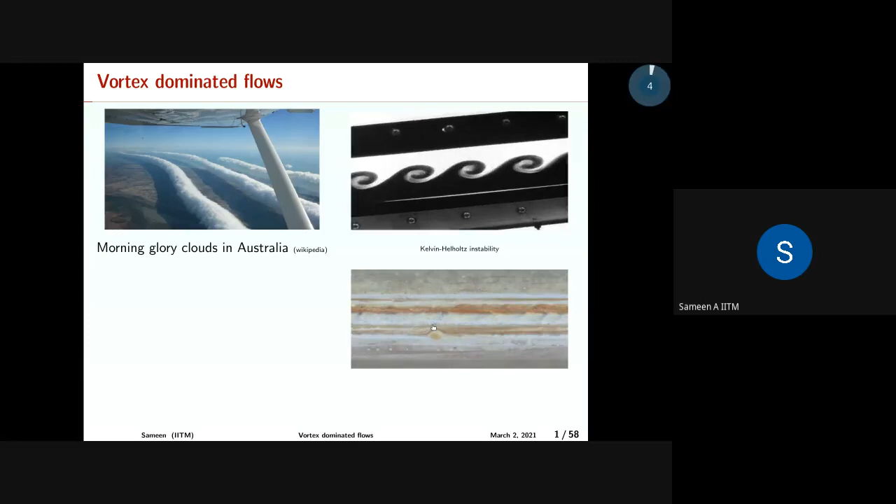So what are the reasons for these? When do these vortices break down? All kinds of scenarios are something that you see in this picture. This is one of the recent publications that has come out.

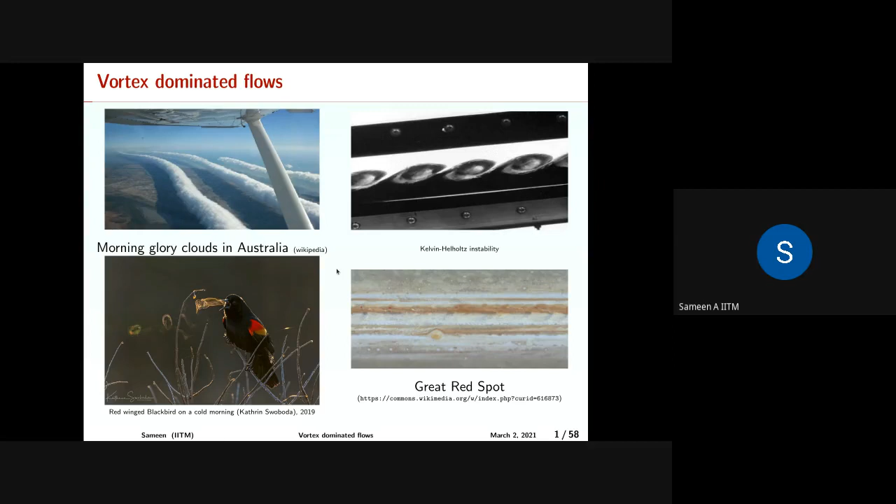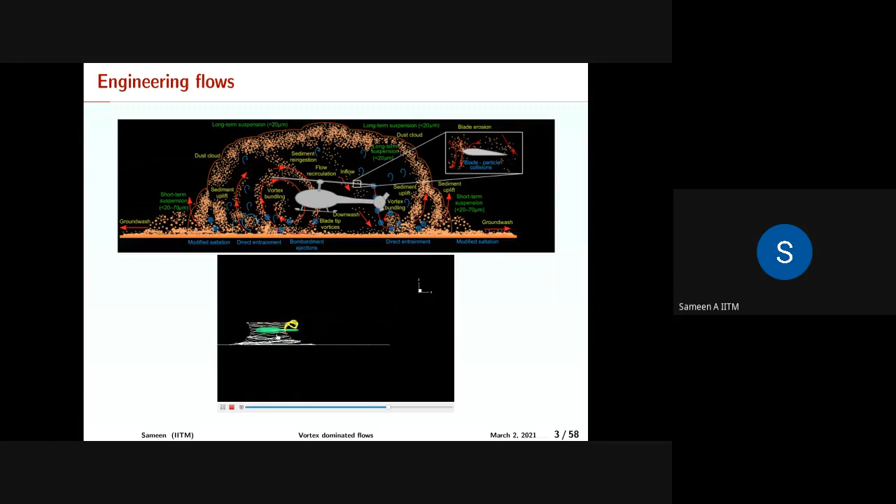Unlike the fixed wing aircraft, the rotation itself creates a vortex, and the vortex creates a lifting mechanism, as you would see here in this movie with the helicopter. I am not showing the blades here, but these blades create a long vortex, something like this, and it creates the lifting mechanism associated with this.

If you look at this particular... I missed one. Yeah, this is one of the interesting videos that I wanted to show. So these long vortices associated with engineering flows, especially in aircraft, are really important for the lift and drag mechanism associated with the aircraft.

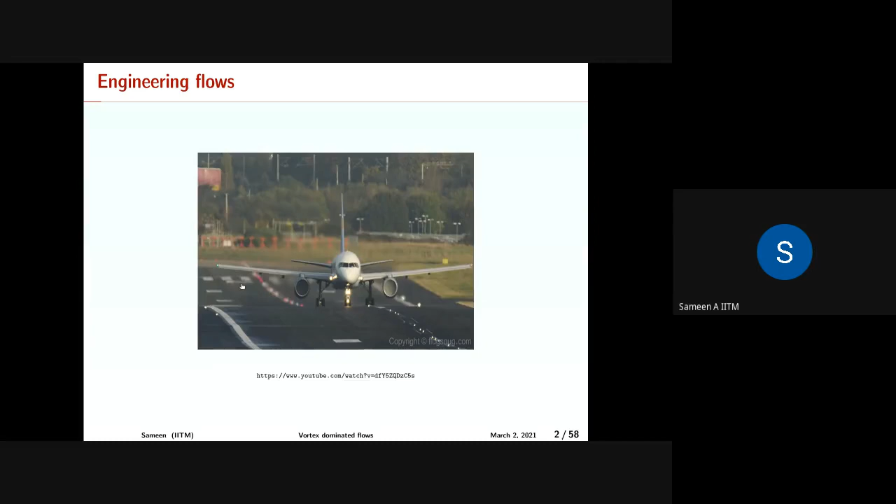So for example, if you see here, this is a YouTube video, so anybody can get this. If you see this, these edges will create a long vortex that is going to come. So the aircraft is moving into the cloud, and it's going to create a large vortex behind the aircraft.

Let me go see, for example, here in this picture, this vortex is coming out of the control surface that is here, and this is a long vortex. And this long vortex has a problem because that's going to add to the drag force of the aircraft.

So you may want to avoid these kinds of large, long vortices, especially the one that typically happens near the wing tip. Here, it's not going to happen. These are called winglets, made to avoid these kinds of large vortices. So in some aircraft, you don't see these winglets, and that happens.

There is low pressure here, high pressure at the lower surface and low pressure on the top surface. So there will be fluid going from the high pressure to the low pressure through the sides or the tips of the airfoil, which creates a large vortex, as you see in the previous picture. When it moves into the cloud, you see two vortices coming out of the aircraft, and that is going to be fatal for the aircraft that is behind.

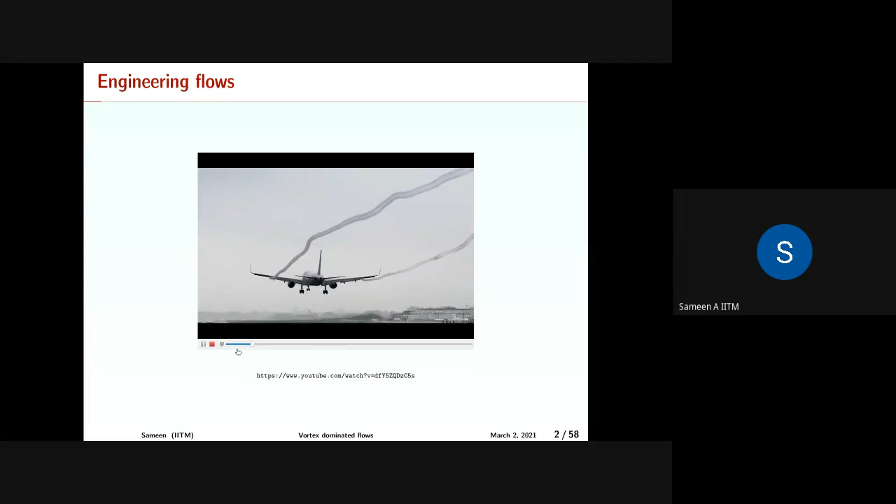So if it is happening near the airport, say for example... I don't know how to cut the voice. Yeah, so you can see these kinds of vortices happening. Let's look at the voice slightly... maybe I should cut the voice for the next presentation.

So look at these large vortices that's being made behind the... so these are happening at all the... let's wind up this. Yeah, let me push ahead and see. Yeah, you can see the large vortex that is happening here. And if these kinds of vortices happen near the airport, then it's going to be very fatal. So let's push ahead, and maybe I'll stop and discuss this.

So what happens is, if you have these kinds of large vortex happening at the airport, the oncoming aircraft behind it has to wait for some time till this vortex dies down. You have to pay taxes to the airport for making the other plane wait to land or take off. So that adds up to your airport taxes, which is essentially being levied on the passenger ticket pricing.

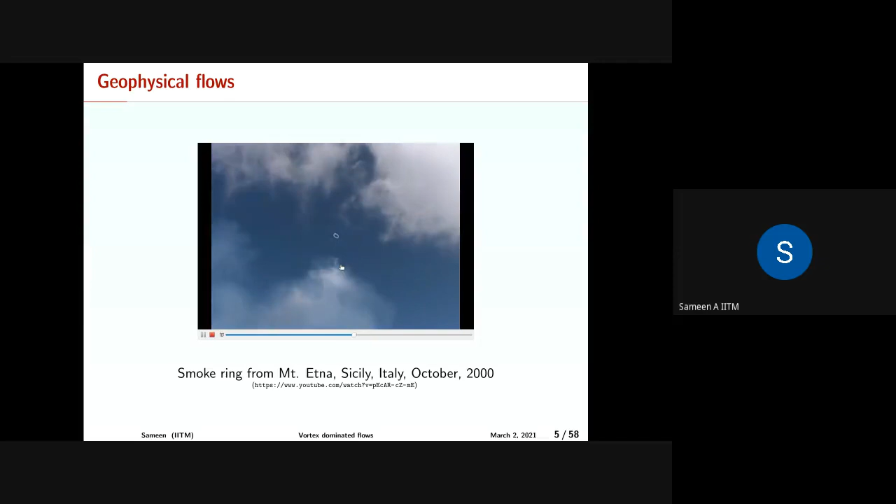And this is another example: volcanic eruption. This volcano emits gas intermittently, and when it emits gas, it emits something called vortex rings. These are again axial vortices, but connected back to itself. It forms a beautiful ring, and along with this ring you entrain particles, and these particles are carried forward a longer distance compared to a columnar vortex.

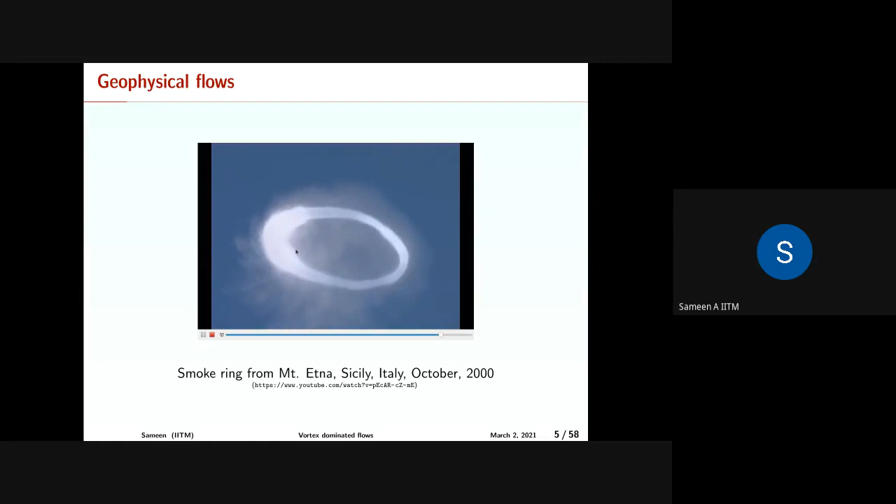So the breakdown of these vortices is again a very pertinent question, because that's an engineering problem you would see in a combustion chamber or an internal combustion engine, where fuel is injected intermittently, creating a vortex ring, and the question is how much fuel this vortex ring can carry forward into the oxygen filled chamber.

So the question we ask is what tools do we need to understand these kinds of flows. I will go through some basics of vortex and vorticity. I'll assume most of you know fluid mechanics quite well, and the discussion I make here is with that assumption. But if you have any questions, please stop me and ask at any point. We can stop and discuss - there's no rule that I should finish all 58 slides. We can stop at 30 slides, no problem. So just stop me whenever you think there's an inconsistency in my speaking.

So the velocity field, when you take the curl of the velocity field, you get a quantity called vorticity, and this vorticity defines the rotation characteristics of the fluid flow. This vorticity is one of the fundamental quantities that you try to compute or understand.

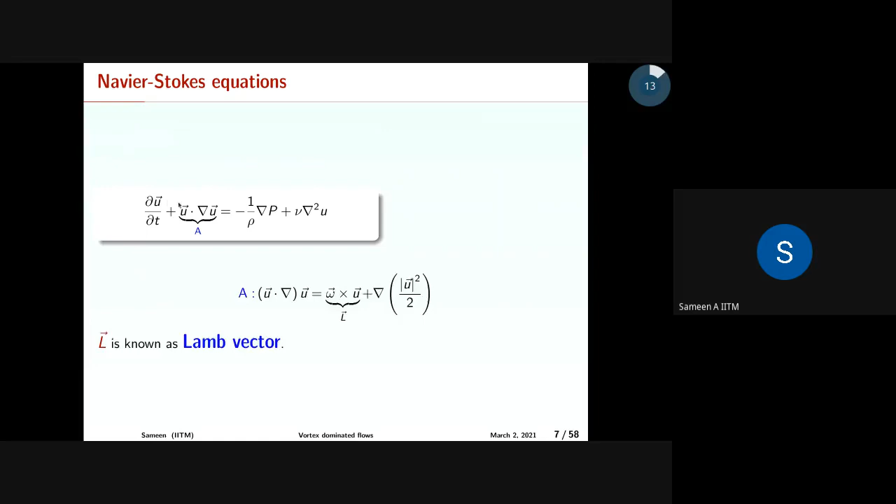So this is always zero irrespective of whether it's compressible or incompressible flow. I have assumed those two, del dot omega equals zero and del dot u equals zero, in the expansion of this identity, and I get these two terms. I put this term on the left hand side.

This particular term comes along with the material derivative of the vorticity, so I can use this. There is a sign problem here - yes, there is a sign problem here. This should be minus. So there is omega, d omega by dt, which is the material derivative or the evolution of vorticity with respect to time, and then you have this quantity called C, which is what we call the stretching or tilting term.

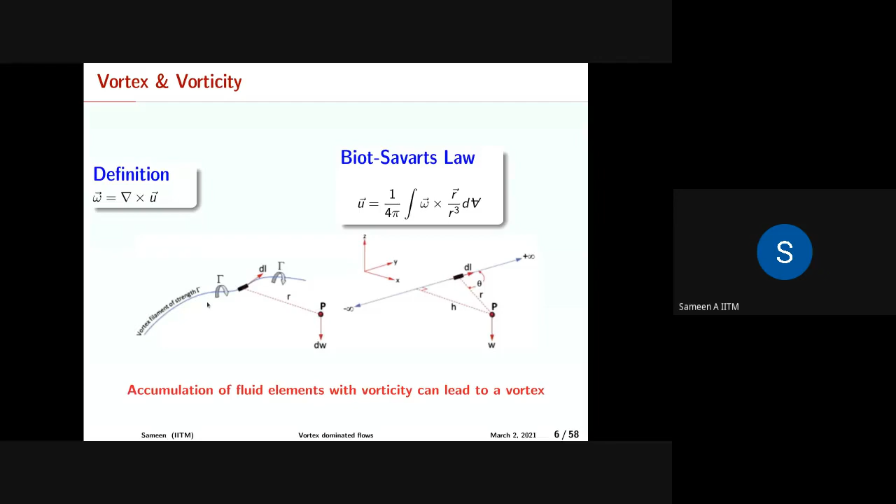The importance of the stretching or tilting term is this: if I have a vortex tube and I stretch that vortex, say for example if I have a vortex tube here, if I stretch this particular one, that is going to change the vorticity. How does it change? It changes in this particular fashion. So the shape changes, and the vorticity brought about by the shape changes of your vortex tube or vortex filament also contribute to the evolution of vorticity itself, and that is what it says.

So both these terms are coming from the nonlinear terms. Your C and the Lamb vector, both are coming from your nonlinear terms.

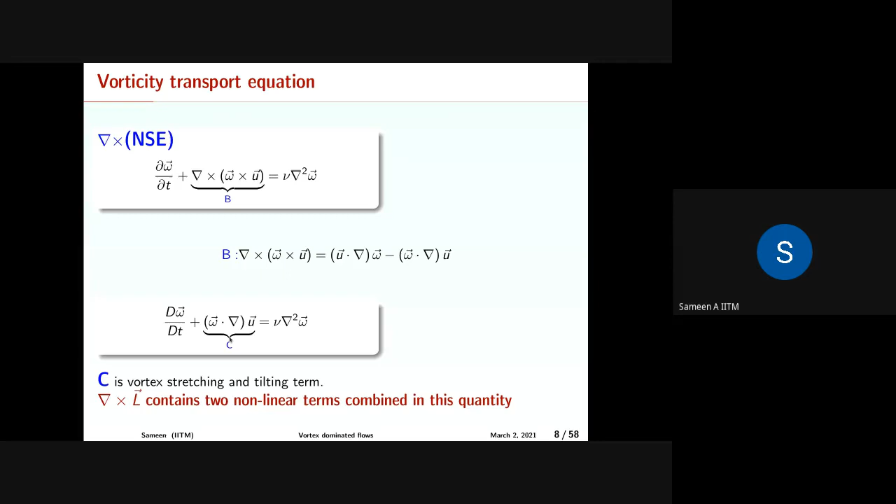If I try to see the kinetic energy in an inviscid flow, there is no way your kinetic energy can dissipate. For an incompressible flow, there is no way the kinetic energy can dissipate unless there is viscosity. So the evolution of your kinetic energy is balanced by the viscous forces associated with it.

I can rewrite that in terms of vorticity, where I get the inner product or dot product of vorticity. So omega dot omega is what we call the enstrophy, and this enstrophy is directly correlated to the kinetic energy of your flow. It looks like vorticity is everywhere, and all the fundamental physical quantities you know can be rewritten in terms of vorticity, which seems more fundamental compared to velocity. So you would like to see vorticity as one of the parameters ruling the fluid flow.

So am I going fast, or is that okay? Yes, it is fine. It is fine. Okay, yeah, okay.

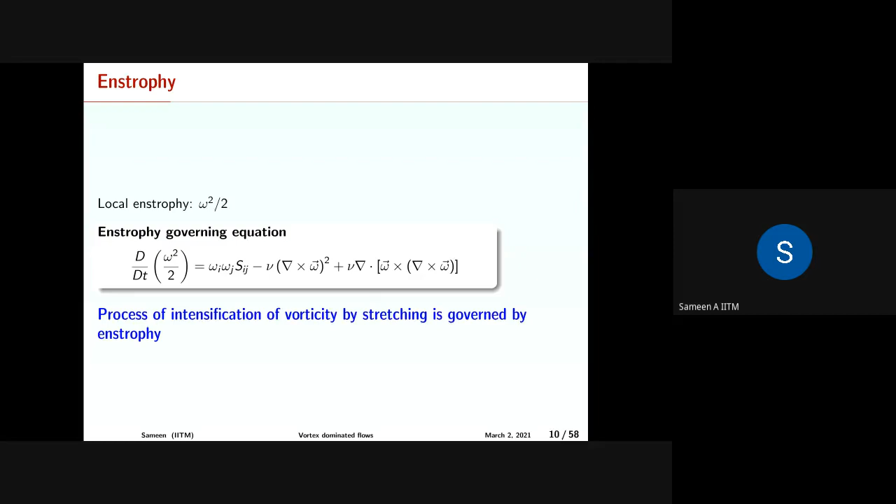In turbulence, this equation is very important, because the enstrophy of the fluctuating quantities actually creates the dissipation terms, and it also contributes to the production terms, production of turbulent kinetic energy, and so on. So this equation I've written here is a very fundamental equation, typically not discussed in a fundamental course on fluid mechanics. I just thought I would put it here.

If you come back to the nonlinear terms between the curl of omega, the u cross omega, and then define something called u dot omega, I can write an identity. This is nothing but like cos square plus sine square equals 1, if you divide the entire equation by u square and omega square. So this identity, similar to cos square theta plus sine square theta equals 1, gives you this particular balance.

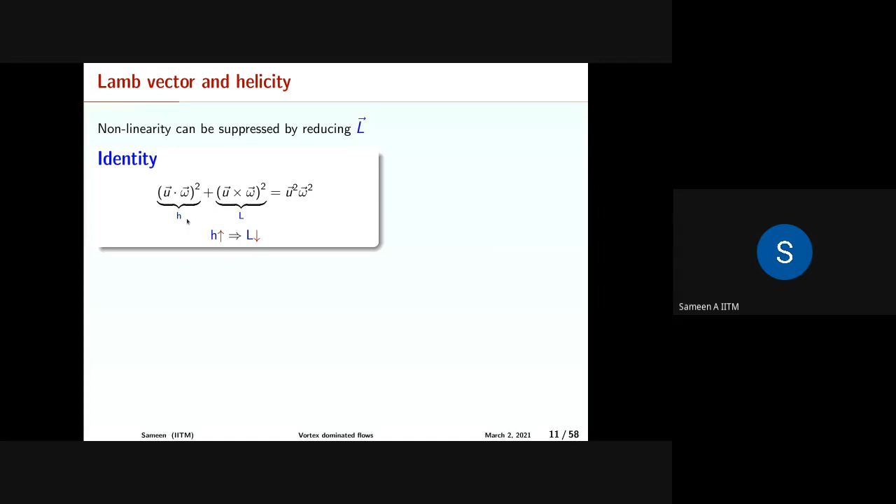This is a balance of helicity, which I am going to define now, balance between H and L, the Lamb vector. So if the Lamb vector is high, the helicity has to go down, and if the helicity is high, the Lamb vector has to go down.

If you look at this term, u dot omega, it tells you how the vortex tube is getting a torsion. It's getting winded and unwinded, and this winding/unwinding of the filament is what you call the helicity, or the helical nature of the velocity vector and the omega vector. So the alignment between the velocity vector and the vorticity vector is what we call helicity.

So helicity - you have the total helicity if you integrate it over the entire volume, but we'll work on the differential quantities, the local helicity, which we call the helicity density, omega dot u or u dot omega. This is going to come in our discussion later on, if we have time. So that is what I have for the fundamental part of helicity.

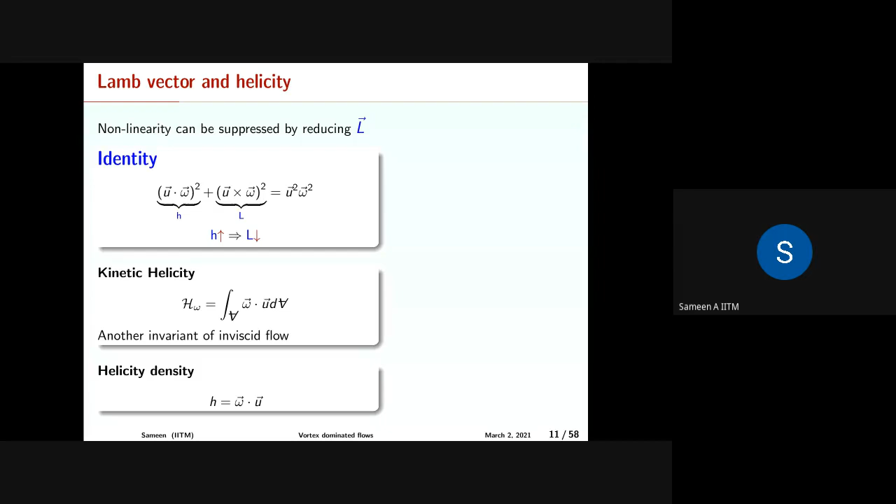Then with this background, we look into something called axial vortices. Axial vortices, as I've told you, are long columnar vortex kind of structures, in nature or in engineering, that you have seen.

So for example, if I have a large delta wing, which is what we use for fighter aircrafts, and I put this in a wind tunnel with smoke coming from the leading edge, there are two kinds of vortices, one on the left wing and one on the right wing, or the top wing and bottom wing. So you have a long vortex kind of thing forming here.

This is very unlike other aircraft where you have a large aspect ratio. Here in the delta wing, these vortices are themselves the lift generating mechanism. So you want this vortex to be on top of the wing for a long time so that you get appropriate lift.

And if somehow the vortex breaks, or there is a bursting of the axial vortex, then the lift on that particular side will go down, which can affect the controllability of your aircraft. So the stability of this vortex, or the longevity of this axial vortex, is again an engineering problem.

In aircraft jargon, the breakdown is what we call the bursting of this particular vortex. So bursting and vortex breakdown, if you read them somewhere, actually mean the same thing. Just that the scenario is slightly different. Breakdown is usually used for geophysical flows and fundamental fluid mechanics, whereas bursting is very specific to what you see in the aircraft industry.

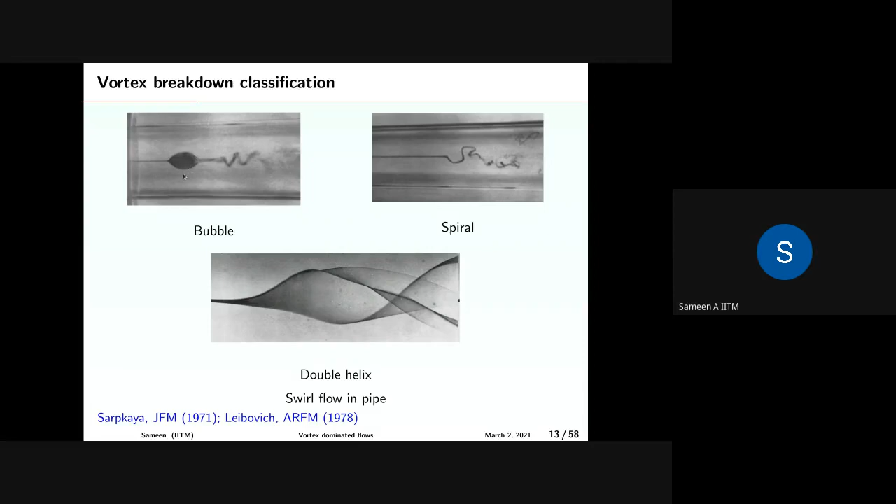In this talk, I am going to present only this particular portion, the bubble type of breakdown. Most of the remaining talk is part of these two publications that have come out. So we take a model problem.

Instead of going for a large atmospheric scenario or engineering setup, we take a model problem to analyze this. We are dissecting the larger problem into a smaller problem to see what physics we can get out of the vortex core and the breakdown of the vortex core.

So what we have taken here is a cylinder, then you rotate the top cylinder. If you rotate the top cylinder, you create an axial vortex coming along the axis, and you try to study on what scenarios, what rotation speeds you have the axial vortex.

In this case, we have also heated the bottom portion so that it can simulate the actual scenarios, for example, tornadoes, whenever they hit a plane which is at a different temperature than the fluid flow.

So you want to have the balance between, say, the buoyancy force that is affecting the vortex and the rotation speed of the flow. That is decided by this particular setup, which is something called Vogel-Escudier flow. I will discuss that in the next slide.

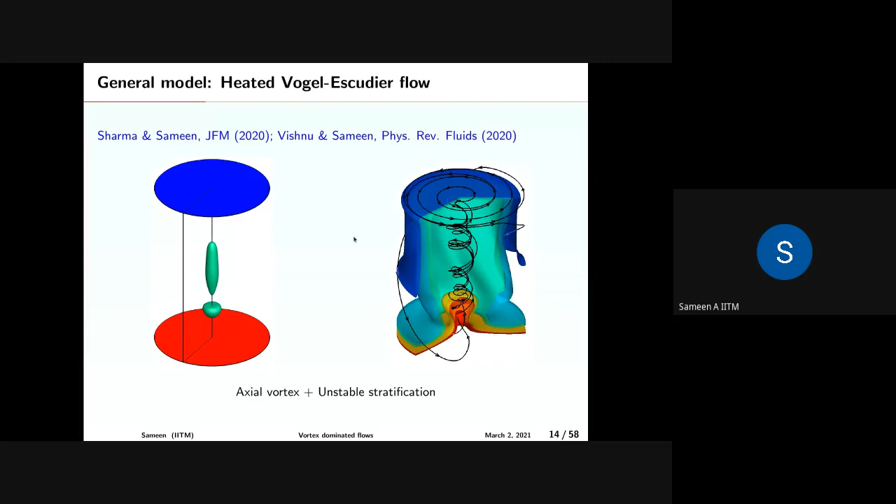So the governing equation that I'm going to use is the incompressibility mass conservation equation, which is del dot U equals 0. And then I have the momentum equation.

So I get these non-dimensional numbers if I scale my length using the height of the cylinder and the velocity using the rotation speed and the speed generated by the buoyancy. So this second part of your velocity is what is common to the Rayleigh-Bénard community, and this is what is common to the rotation dominated flows.

So you have this U reference, or the scaling factor for the velocity, and of course the time is just the ratio of the two.

Okay, so I have substituted in the Navier-Stokes equation these two scalings, and I obtained this. And the temperature is again scaled by the top and bottom temperature, hot and cold, with the delta T that is happening between the two plates.

Okay, so that will give me this kind of non-dimensional number, where if I put Reynolds number equals 0, I get back the Rayleigh-Bénard flow, which is quite familiar to most of you.

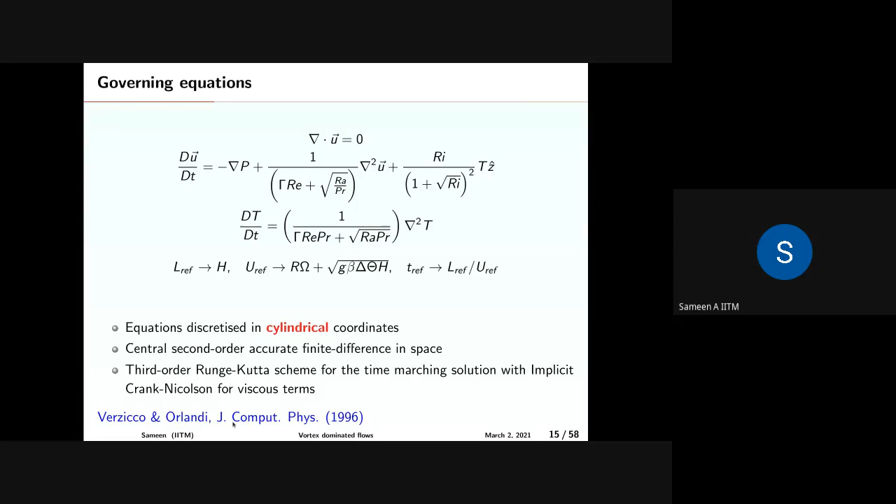And we solve this in cylindrical coordinates, using the finite difference, central second order scheme. I will not go into that, this is a standard technique. We have not done anything new in the technique, we have just taken the technique available, which has already been published and used by several people, and tried to see the physics of what we are doing. I will skip this as well.

So I will start with something where there is no heat. So you have this setup: I have the cylinder, then I rotate the top cylinder. I get this flow.

When I rotate this, the fluid here is thrown to the outside radius, and it creates a spiral at the near top region, and it hits the sidewall and goes down. And once it goes down, there are fluids coming from all around the sidewall, and they meet at the axis, and that's pushed up so that it creates a long thin vortex at the axis.

That is what is shown here. This red line can be assumed as a vortex, and it is spiraling upward. So the parameter that you want to vary here is, one, the shape of the cylinder, which means the ratio of the radius to the height, the aspect ratio. So depending on the aspect ratio, this structure can be different, and depending on the flow speed, the structure can be different.

So the two parameters that we study here are Reynolds number and the aspect ratio. So I have kept the Rayleigh number to be 0 in the first part of the talk, and if we have time, we will go to the other part as well.

Canards were used in delta wing aircraft. Ah, okay, so that is only for the tip. So your tip vortex would, the strength of the tip vortex would be less. Okay, that's all it typically is.

Okay, sir. Yeah, simply put, that is how it is.

Sir, why is vortex generation in delta wing not desirable? Like vortex is created after passing the wing, right? Vortex breakdown is not desirable. Vortex is desirable, you need the vortex to generate the lift.

Unlike the rectangular wing or the wing with a large aspect ratio, the mechanism of lift is slightly different in delta wing, and you need that vortex to have an appreciable lift. So you don't want that vortex to break down. You don't want a breakdown scenario in a delta wing.

That is what I said when it's not desirable. So the breakdown is not desirable. You want the...

Sir, should that vortex be at the leading edge or at the trailing edge? It is actually coming from the leading point. It's a delta wing, so from the leading point itself it starts coming towards. Okay sir, thank you, is that clear to you?

Yes, sir. Okay, so one more question. So what is the physical meaning of enstrophy?

Okay, you can see my slide. Yes sir, we can see. Okay, so if you look at this, enstrophy is omega dot omega, which is the dot product of vorticity with itself. So when you have u dot u, what does it mean? It's kinetic energy, right? It's u square by 2, which is the kinetic energy.

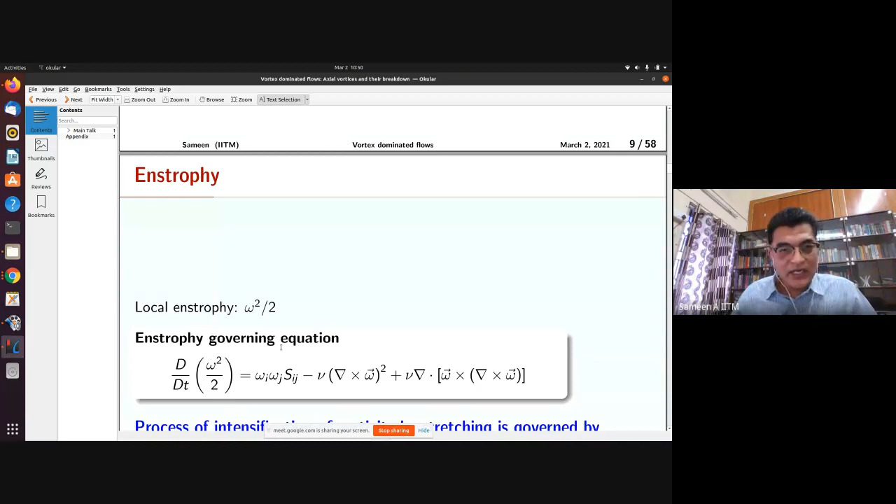Now, omega dot omega, you can actually relate it to the kinetic energy evolution rather than the kinetic energy. And that is why it is important than the kinetic energy itself. You are worried about kinetic energy evolution rather than the kinetic energy itself in a fluid flow, or the material derivative of kinetic energy rather than the kinetic energy itself, because kinetic energy of a fluid doesn't mean anything in a flow.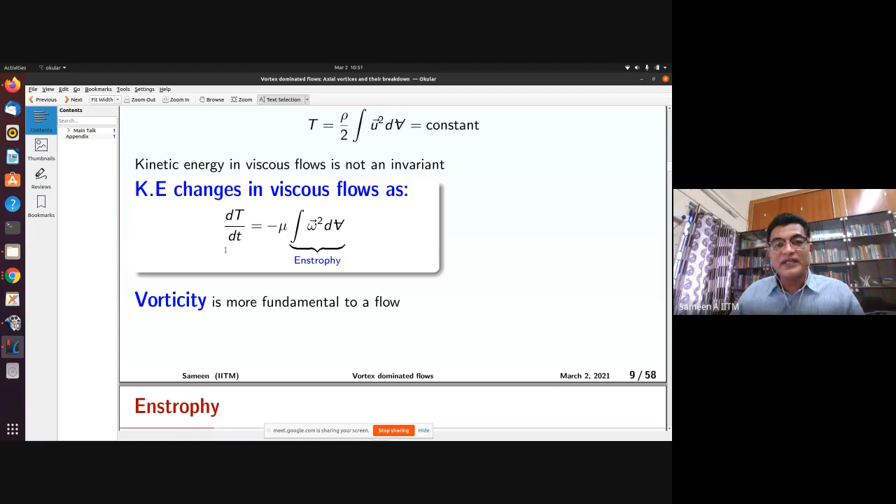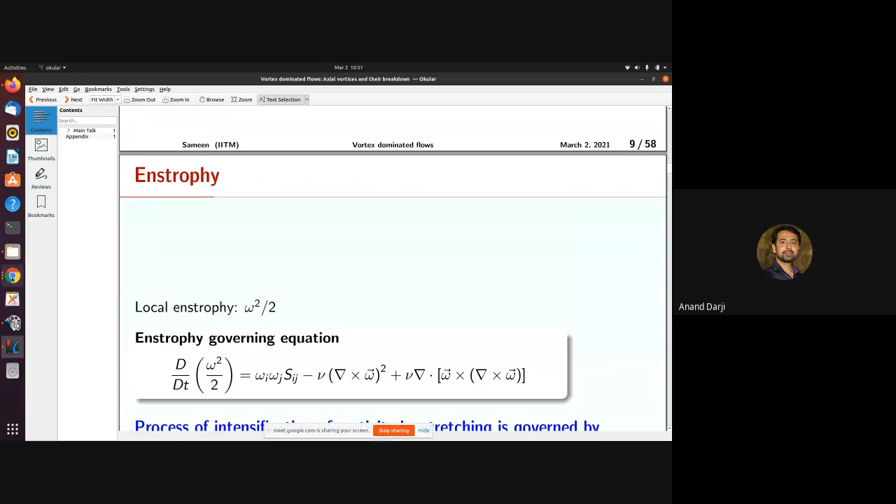So that is related to enstrophy rather than your velocity. So when we derive this Navier-Stokes equation in the stream function vorticity formulation... but once again, I didn't follow. When we convert Navier-Stokes equation into the stream function vorticity equation, at that moment we are also getting such a term. This is something new that I come to know. In vorticity, when you convert to vorticity stream function, will you get enstrophy?

I'm not sure of that. No, we don't get enstrophy. We got del square omega. So that del square omega is fine. Del square omega is, your viscous terms can be written in terms of del square omega. Yes, but that's still vorticity, it's not enstrophy.

Thank you. Thank you, sir. Yeah.

So if you read Turbulence by Davidson, there is a book by Davidson, the book title is Turbulence. The first chapter or second chapter actually deals with vorticity and enstrophy quite nicely. If you know the index notation, I think you should read those chapters so that you will get a good grip on it. But it's written in index notation.

Thank you, sir. Okay, anything else? Okay, so maybe we can continue.

Okay, so you can see my slide, I hope. Yes sir, it is visible. Okay, so the next 10 minutes or so, or maybe slightly more than that, is the PhD work of Manjul Sharma.

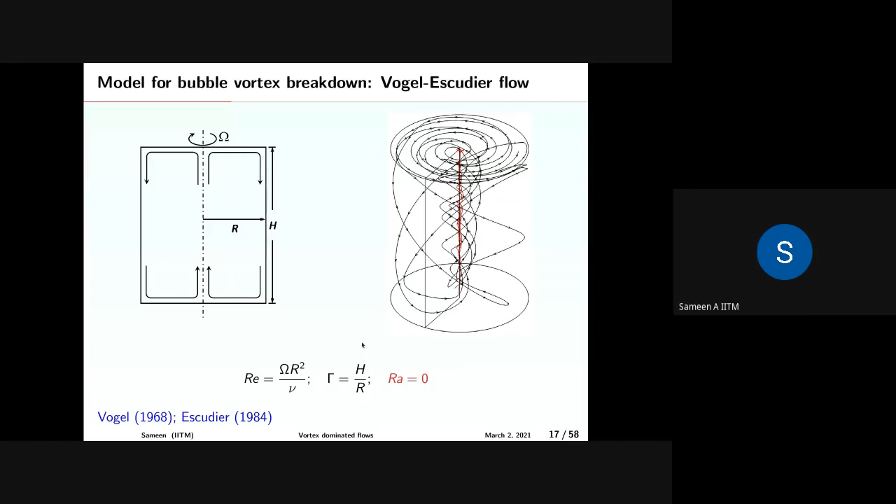So what he has done is he has taken this Vogel-Escudier flow setup and created this vortex, and masked in the parameter Reynolds number and aspect ratio, and identified several new scenarios, new regimes. So we have validated the code with Escudier's original publication that came in '84.

So what he has done is just a flow visualization. He has masked in several aspect ratio and Reynolds number, and you have photos of this dye visualization. The left side is Escudier's original figure, and the right side is our computation, shown using streamline plots, versus Escudier's dye visualization. This being a steady flow at this particular value of Reynolds number and aspect ratio, which I will discuss in the next slide, why it is steady. So you have the particle lines and the streamlines matching perfectly well.

You also have another set of experiments, PIV experiments, where they measured the velocity, axial velocity, and we compared with that. So the lines are our computation, and the cross symbols are all their data, many years later to Escudier. So with this I'm trying to convince that the code is working fine.

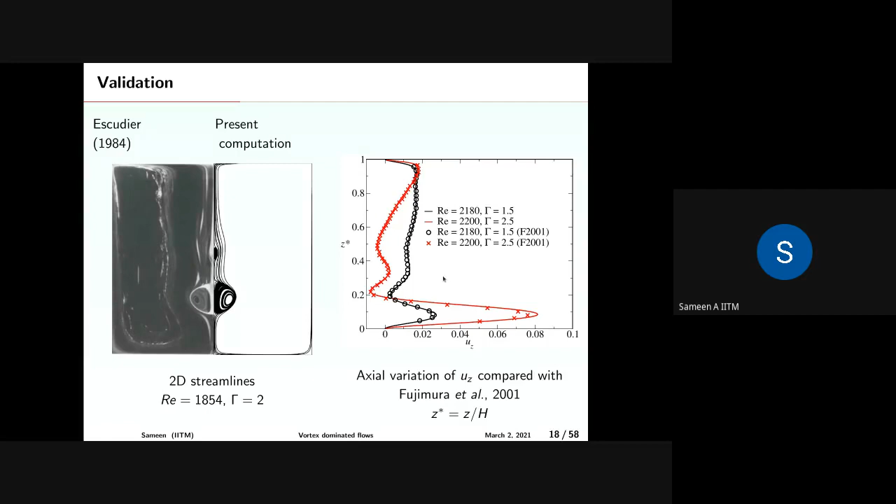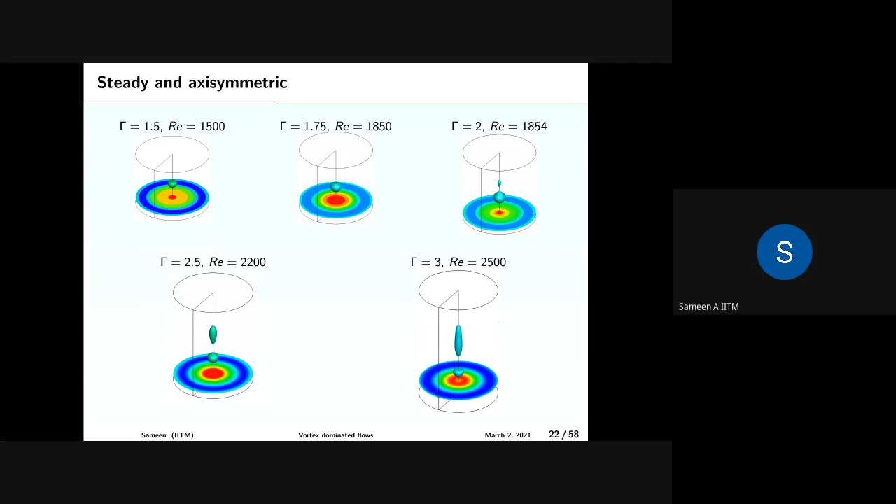The bubble is identified by the surface of axial velocity 0. So along this bubble, your uz, the z being the axial direction, is 0 along the surface of this bubble, and that's how you identify the bubble. There are several ways of identifying it. This is what we have followed, which we think is correct, but we don't have a proof. We will also discuss that this correlates with the helicity definition, so we think this is more correct than other methods, like using streamlines.

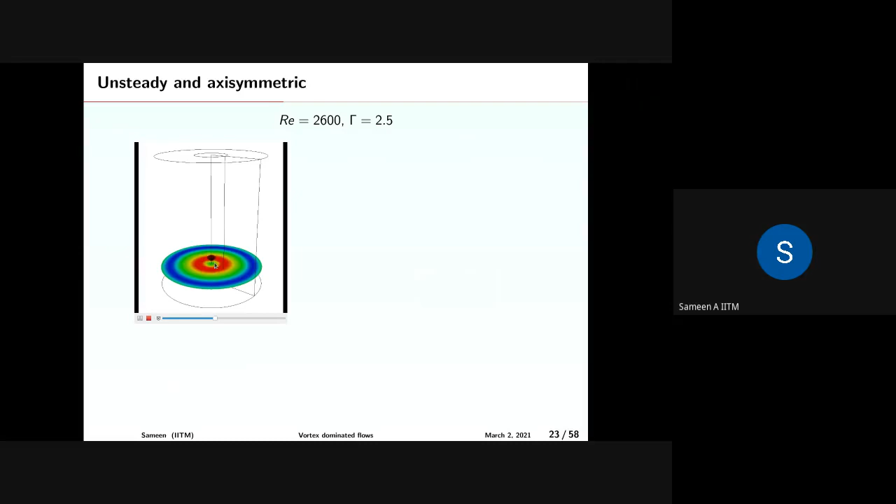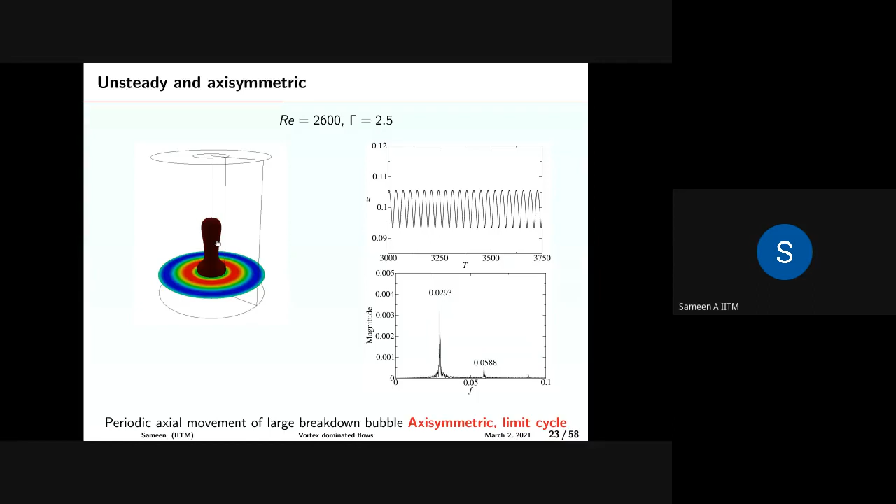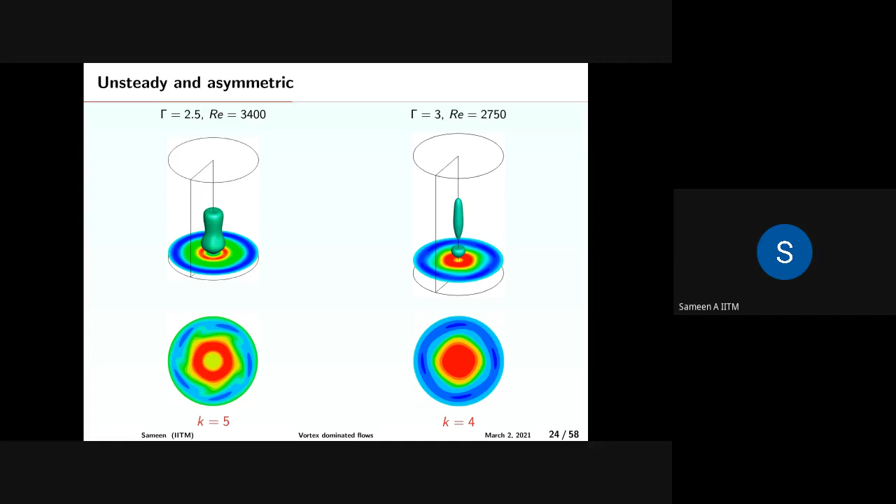When it goes to the next regime, the unsteady asymmetric one, there is a variation in theta. If you look at this picture, there's a clear variation of quantities - this is uz, and these velocity contours show variation happening near the side wall, not near the axis. So near the axis it's still axisymmetric, but away from the axis it's non-axisymmetric. So the bubble may be axisymmetric, but the surrounding region is completely non-axisymmetric, as this plot shows.

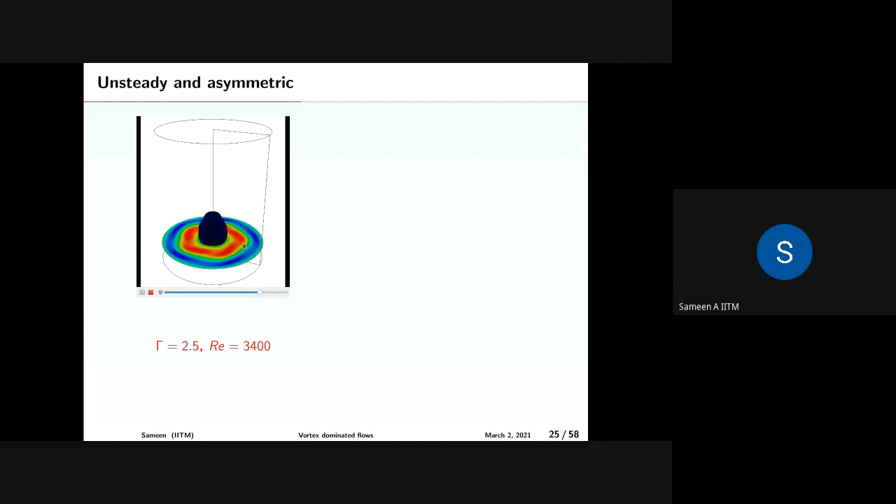So near the axis it's axisymmetric, and outside it's non-axisymmetric, which is seen in this movie. The bubble is oscillating, and there's no variation along the theta direction, but the waves surrounding the flow do oscillate. There's a movement of waves along the side walls, which is non-axisymmetric. So again, if I put a probe here, I can identify and pick the oscillating frequencies and the dominant frequencies associated with the flow.

So this is not yet turbulent, because there are only a few frequencies here, and then you have this particular structure. If I want to identify what structure that is, for the same flow - same aspect ratio and Reynolds number - I can pick out these waves. For example, this wave number is 5, so if you count the number of red peaks here, that's 5. So the waves perfectly match what you see there.

How I get this plot is actually quite easy - you take the instantaneous flow field and subtract the mean flow field from it, then take a Fourier transform along the theta direction to pick out this particular precise mode. So you get that mode, and the 3D version of that mode is what you see here, showing the helical nature of these modes.

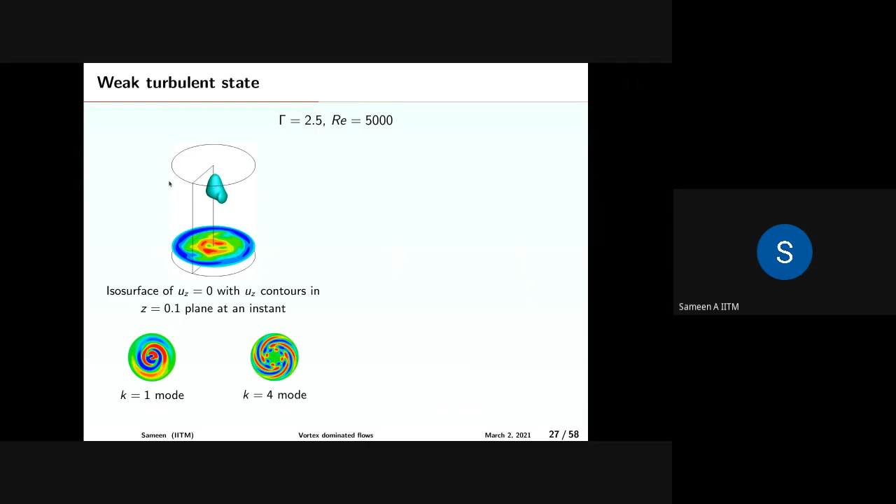Not just that, if you look at the modes, you see that these modes are wave-like structures, unlike in a highly turbulent flow. These modes are quite wavy in nature. So you have these waves plus these many frequencies. So we call this the weak turbulent state.

And if you look at this, your k equals 1 frequency, or the most dominant frequency, you will see that there is only one wave, whereas k equals 4, which is closer to your side walls, not at the center, whereas k equals 1 is closer to the center. So you say that at larger wave numbers, if the wave number increases, it's moving closer to the side wall.

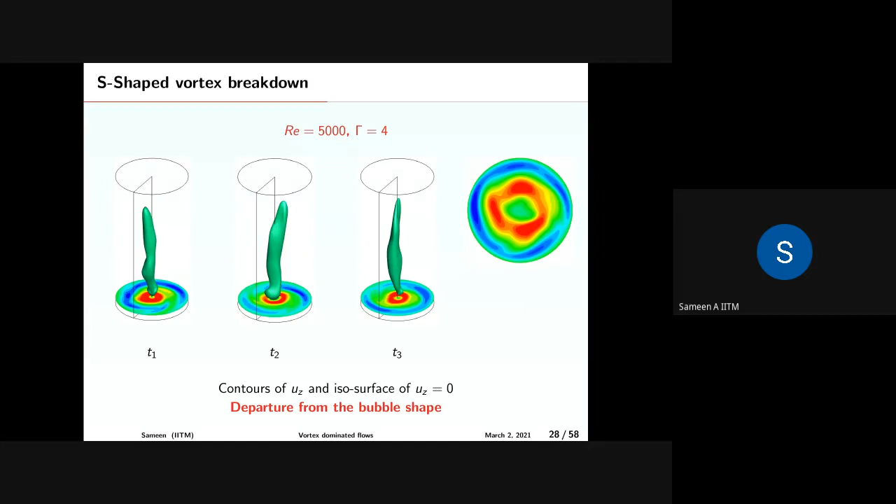And then you go ahead, and at very high Reynolds number, you see the vortex breakdown bubble itself is twisted, tilted and stretched, and all kinds of strain is being felt by the vortex breakdown bubble. And the shape is still persistent. The shape of the bubble is still there, but it's a departure from the axisymmetric bubble. So we call this the S-shaped bubble, and we have seen it only for one particular case.

We are still trying to figure out what happens to the other scenarios. So all these are being plotted here. These are different scenarios: rotating waves, multiple waves, weak turbulence, S-shaped vortex, and all those things have been consistent with what we see here.

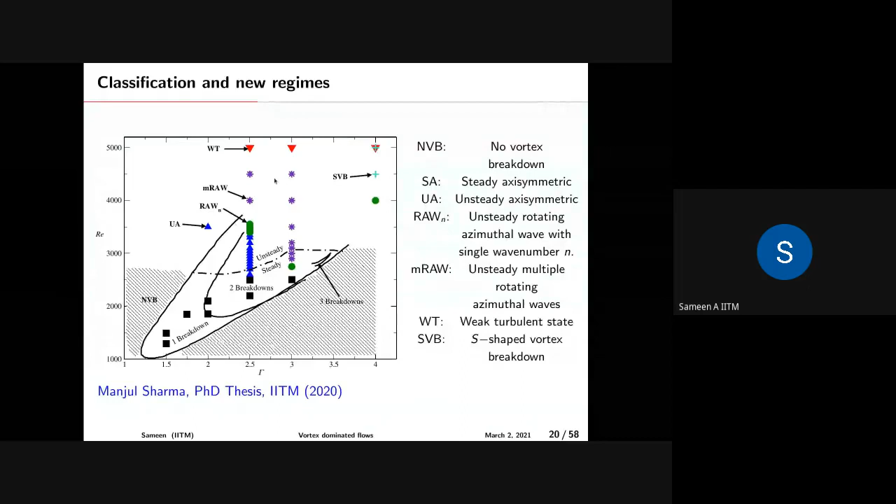Now it's more consistent if you look at the frequency and try to understand how the flow propagates into or moves towards a chaotic state. So if I take the time period of these waves, for a steady flow up to 2,500, 2,600, it's a steady flow. But then suddenly it jumps to an oscillatory flow, which has only one frequency that I have already shown you in the signal, and this tau zero is just one frequency.

So from this state, it jumps to this particular state of some time period, and you march further in Reynolds number. It goes to a state where you have two frequencies. And if you go further, it goes into multiple frequencies and to chaos. And if you come back, if you keep slowing down the Reynolds number, there is a hysteresis seen here, because there is a region where you can only pick it up moving forward and not backward. So there is a hysteresis also seen in this particular scenario.

So if you plot the phase space, you would see clearly why it is single frequency. You see one loop here. There are two loops here that's precessing on the flow. So this precession is also associated with the precession of the bubble. The bubble also precesses, keeps rotating. So you have this case.

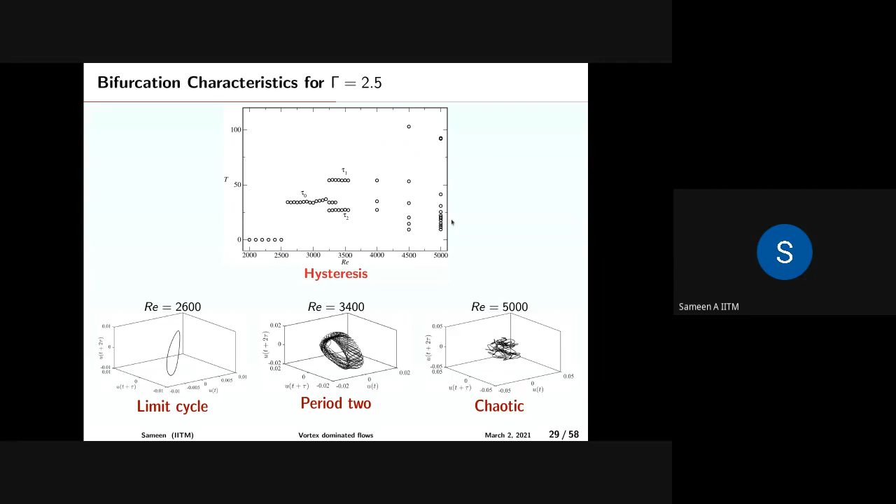So you have a state where the flow goes from steady to unsteady and then bifurcates again, then bifurcates. These are called Hopf bifurcations. So it bifurcates once, then bifurcates again, then multiple times leading to chaos.

So if you look at, if you want to find the relation between these bubbles and the helicity, that is where we have begun our study. There was one publication which tells you that the negative azimuthal vorticity, which is omega theta, the vorticity in the theta direction - the moment you have a negative vorticity, that is the essential condition for vortex breakdown, or the necessary condition for the breakdown.

It's a thin vortex line, an axial vortex that's going from top to bottom. So having this negative vorticity is not a sufficient condition, it's only a necessary condition.

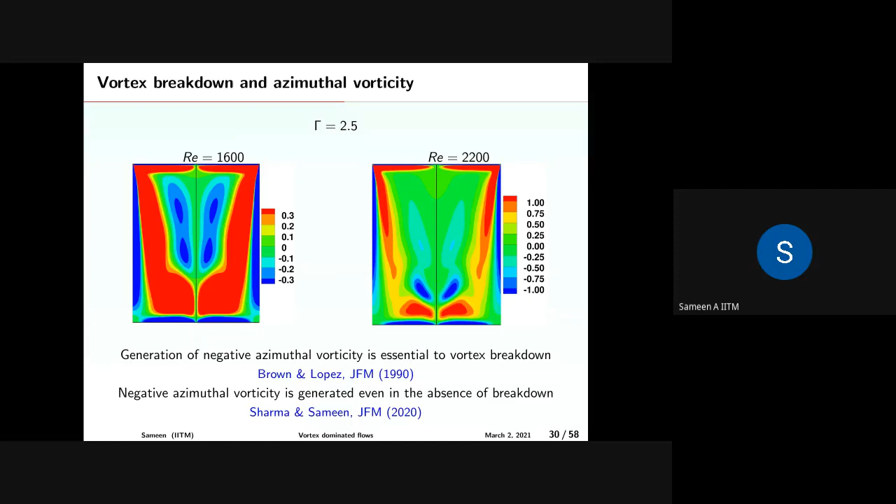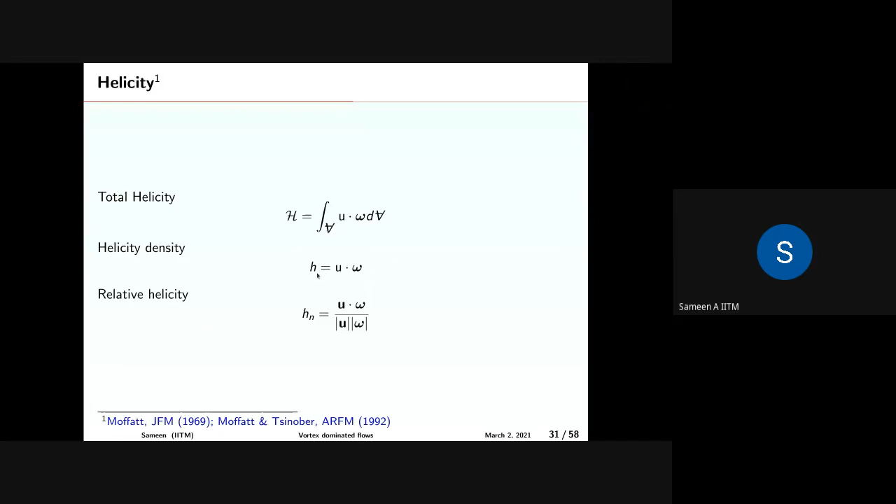What we have shown here is that you can use helicity density to correlate the relation between the occurrence of vortex and the helicity, or the UZ equals 0 envelope. So we have taken the helicity.

So we thought we will investigate more into helicity density, using a technique where you assume that the flow is axisymmetric. If it's axisymmetric, you can decompose the velocity field into two fields: one is the 2D field, and the other is the other component field.

When you add these two, you get the normal velocity vector, which is your u theta plus ur plus uz. But now we have two vectors, v 2D and phi. So we have this, and then you have the associated omega. Associated with this two field, you have an omega, or vorticity, and associated with this field, you have another set of vorticity.

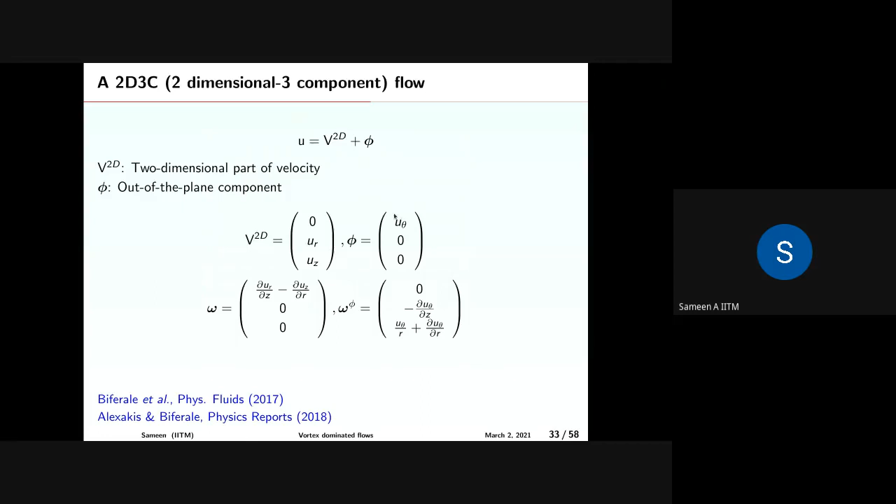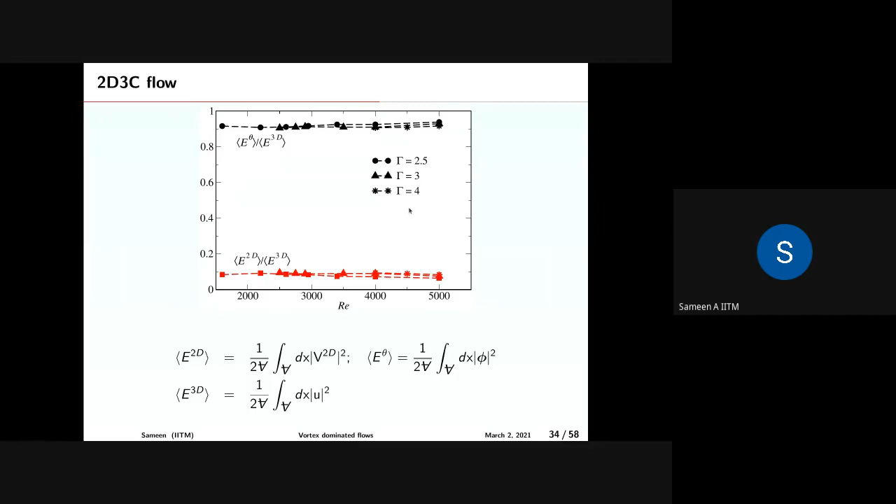So you are well within your limits to decompose the velocity field into the 2D plane and the normal to the 2D plane. That is true for most Reynolds numbers under study and most of the aspect ratios we have done. So you define a helicity based on these two velocity fields.

Which is v2d and omega phi, you get a quantity like this. Now if you look at our publication, what we have shown there is that this will exactly duplicate the bubble, and whether that is steady or unsteady, it exactly duplicates that bubble.

So you could go ahead and claim that helicity is what is defining the bubble, or the topology of the bubble. So your uz is nothing but the alignment of this particular vector into this particular vector. That's what this dot product will tell you, and the alignment gives you the helicity, and that is going to define the bubble structure.

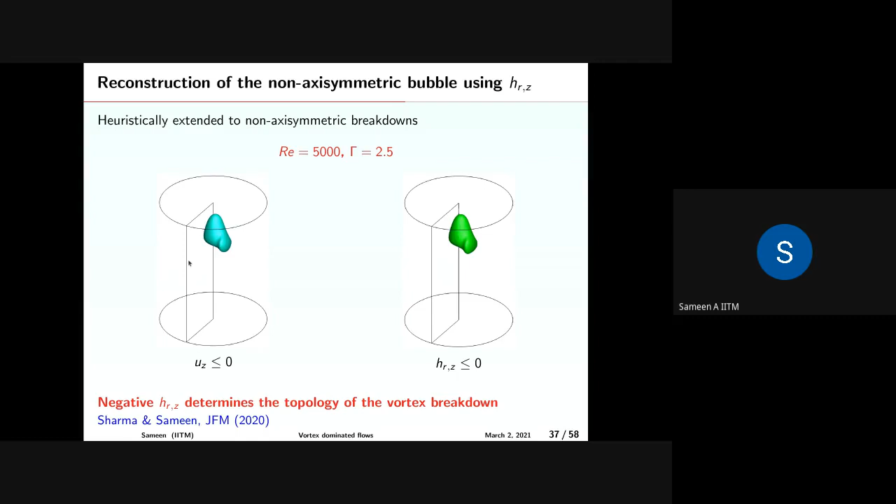The story doesn't end here. This bubble surface is actually a surface which is going to block the mixing of material from outside into the inside of the bubble. If it's an axisymmetric, steady bubble, particles inside the bubble will stay inside, and particles outside will stay outside, which is what we have shown here. These are all the streamlines, and this is one half of the bubble, with a streamline that is closed here. This stagnation point and this stagnation point are what we call manifolds - this is the unstable manifold, and the other is the stable manifold.

You will see that if it's a steady flow, these streamlines would be inside the bubble, and what is outside will always remain outside the bubble.

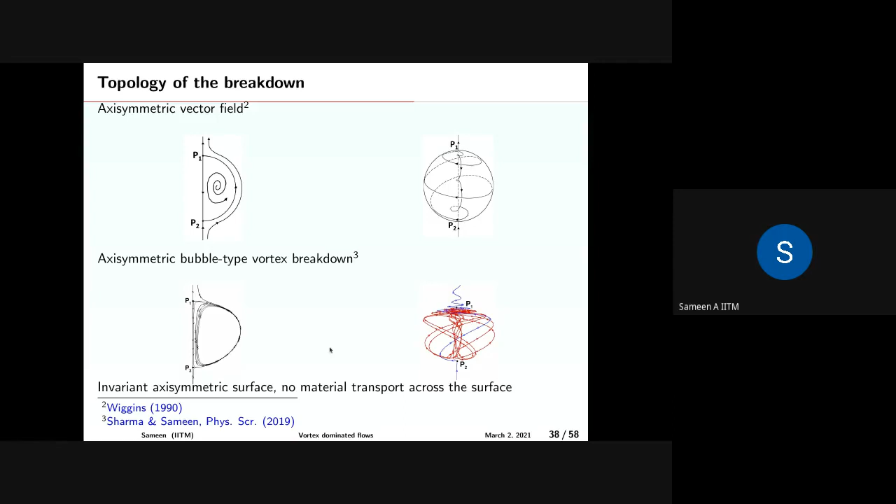If it is 3D, this is what I have shown here. The top figure is the 2D one. If it's a 3D bubble, this is how it looks, and if you look at the plot of streamlines, that's what you see - all the streamlines outside will not cross into the bubble. The blue line is not crossing into the bubble, which is shown in the red streamlines, from points inside the bubble, very clear from the movie I'm going to show here.

In this movie, I have some green particles inside the bubble, and some red and blue particles outside - one closer to the surface, one closer to the axis. If I play this, starting with green inside and blue somewhere on the axis, and red closer to the side wall, and I play it, I see that the particles inside the bubble will remain inside, and these two particles will remain outside.

This is a case with a steady bubble - the bubble is not moving, the flow is steady, there is no non-axisymmetry, it's a fully axisymmetric steady case, a 3D computation. So I'm marching in time the particle movement. The particle inside the bubble stays inside, so there are no green particles crossing the bubble, and no blue or red particles going into the bubble. These bubbles act as a barrier for the mixing process.

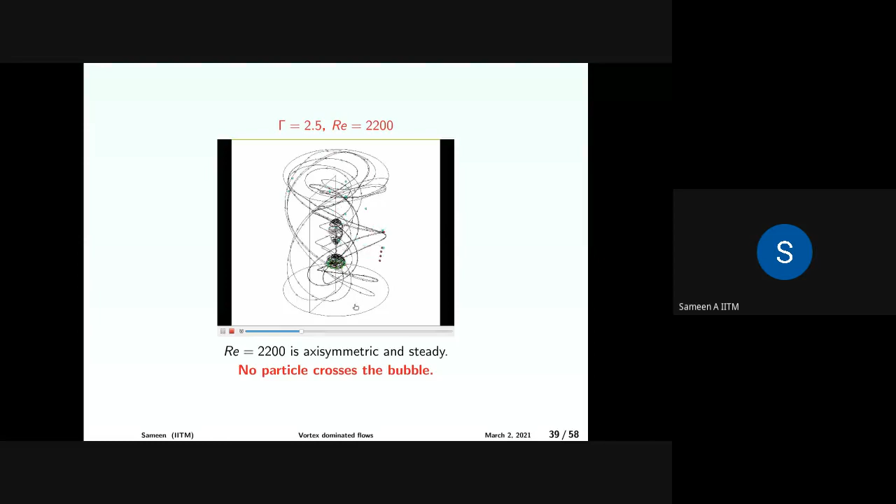If there is a mixing process - say, for example, a combustor where you have a large bubble that is going to hold the flame in a gas turbine engine - if the bubble is there, it is not going to contribute to the mixing, but it will only hold the flame. This is a device that has been coming up recently, not yet commercial, but it has been investigated by several people for holding the flame in the gas turbine engine. Now this is for a steady case, steady axisymmetric.

The moment you have an unsteady flow or non-axisymmetry, where I cannot draw the streamlines because they're changing with time, you have to believe me: to begin with, the green particles are inside the bubble, the blue particles are closer to the axis, and the red particles are closer to the side wall, and you march in time. Remember, the bubble is oscillating - this is a completely unsteady, asymmetric flow.

You will see that these bubbles are ejecting particles out through the stagnation points, which are the manifolds. This green particle will just come out through the axis at that point, and the blue particles will also go inside the bubble as it goes through. So these points that I showed in the previous schematic diagram act as manifolds which suck particles into the bubble and out of the bubble.

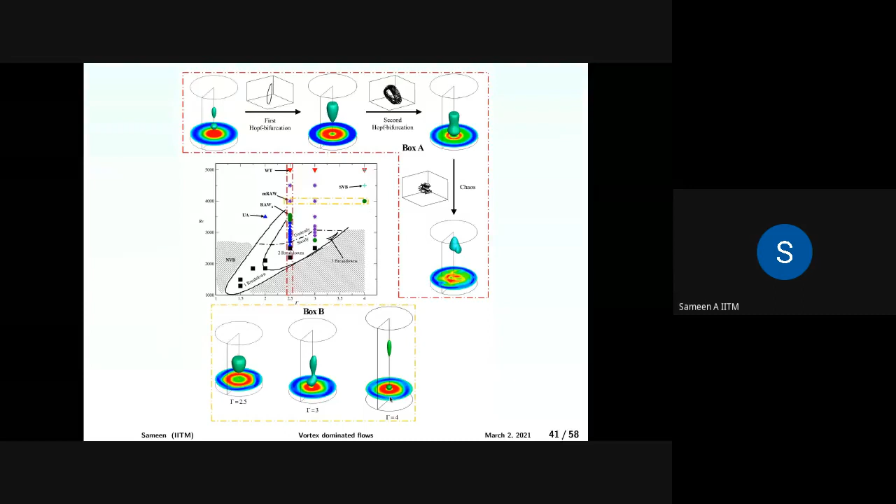So I conclude my talk here: axial vortex has breakdowns, and you identify several regimes of the breakdown, depending on the shape and the speed at which the vortex breakdown happens. So the structures also differ in the parameter space.

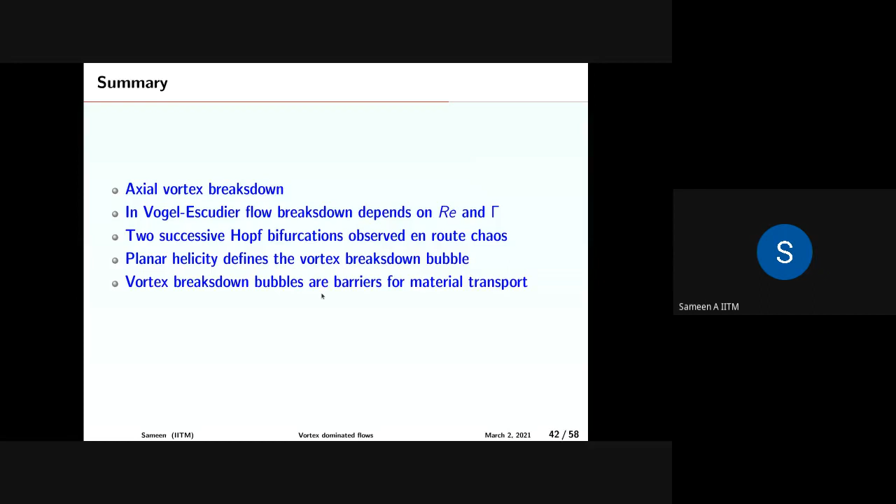The route to chaos is via Hopf bifurcation. You have successive Hopf bifurcations, and the number of frequencies associated with the flow keep increasing until you reach chaotic motion. We have also seen that the helicity, which we redefine by decomposing the velocity field, completely defines the breakdown bubble. The bubble is an unwanted thing in material transport mixing.

Okay, with that, I think I will stop. This particular effect of heating on this is something which I'm going to skip.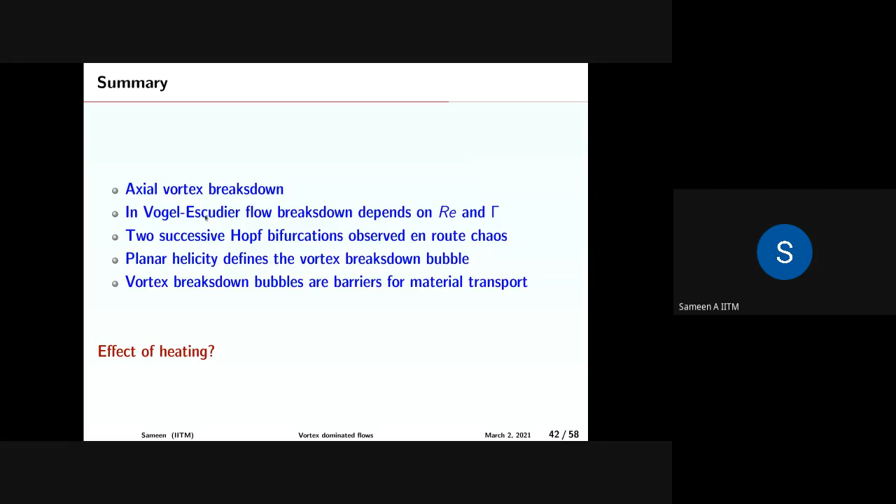Sir, I have questions. Good morning, sir. Sir, in that slide, you mentioned one condition. If, in slide 39... Slide 39. Okay.

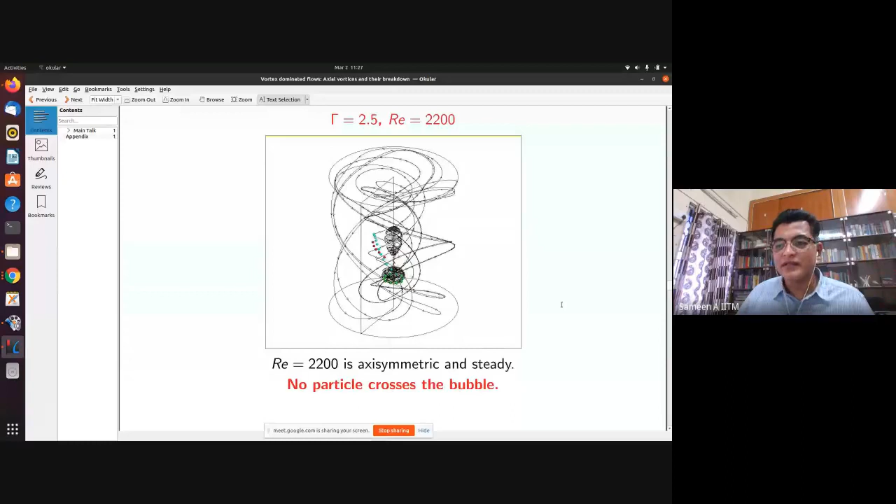This is slide 39. Sir, one condition is there that if Z is greater than, or less than or equal to something. Yes, sir. Sir, if UZ will be greater than or equal to 0, then what will be the condition?

What we are saying is this boundary is defined by HR equals 0. So inside the bubble, this region has HR less than 0. Outside, HR is greater than 0. So the definition of the bubble is what we have given here.

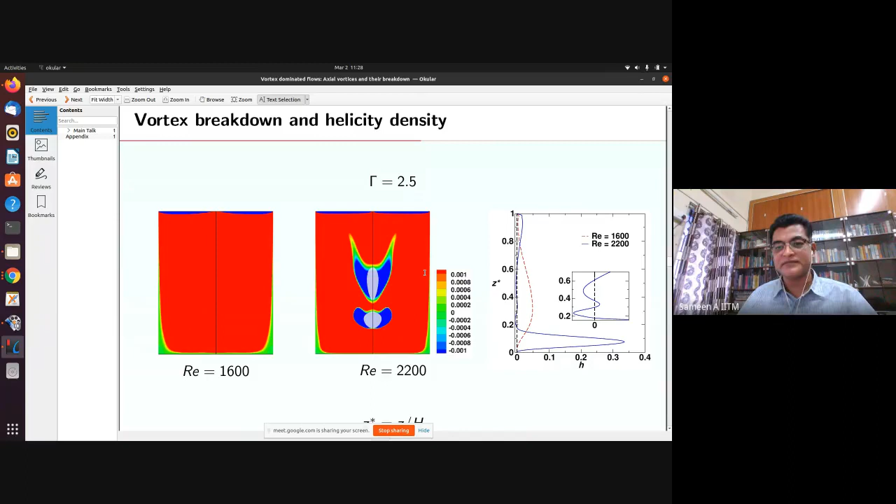All the fluid particles inside this bubble will have helicity less than 0. All the points outside this bubble will have helicity greater than 0, as shown here. Inside this bubble is the gray region with helicity less than 0; outside is greater than 0. Okay, that's all we meant.

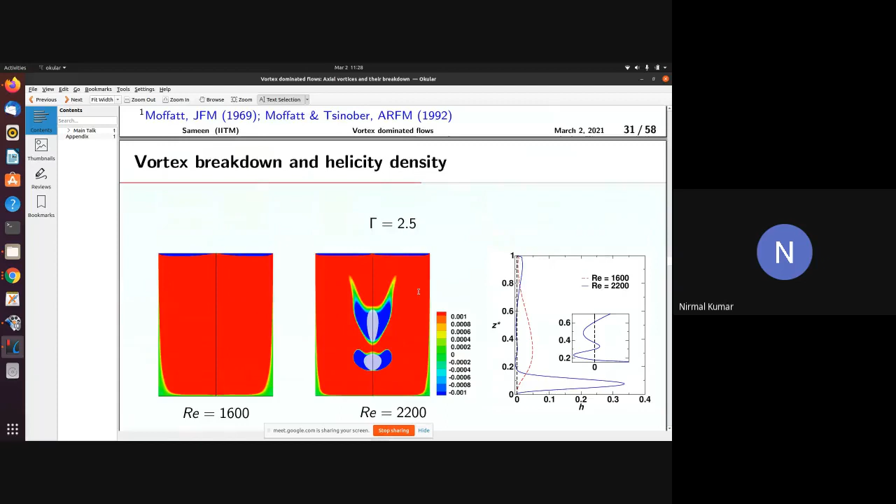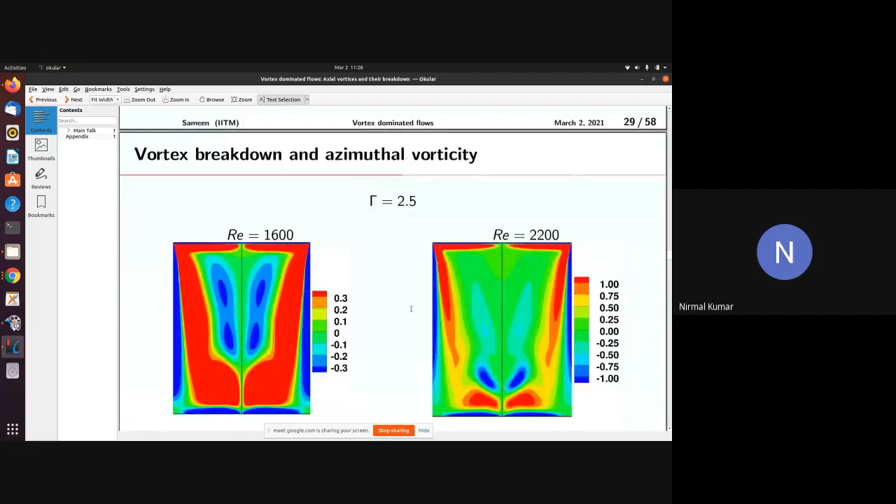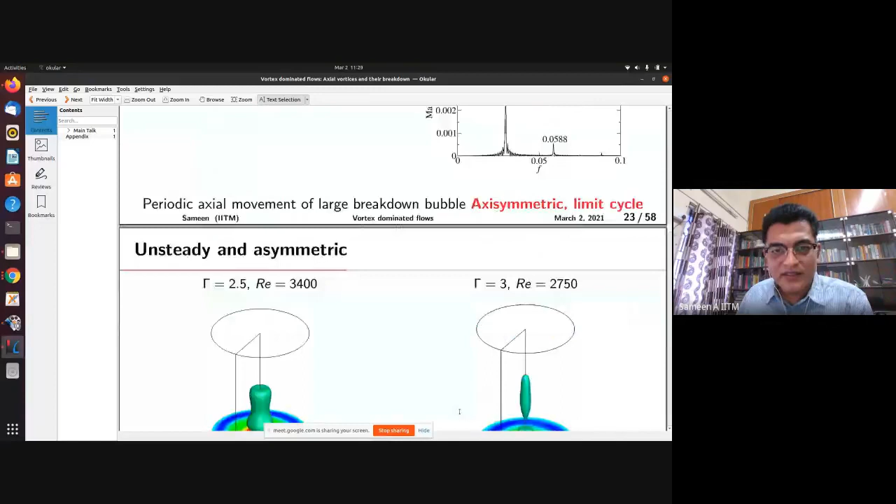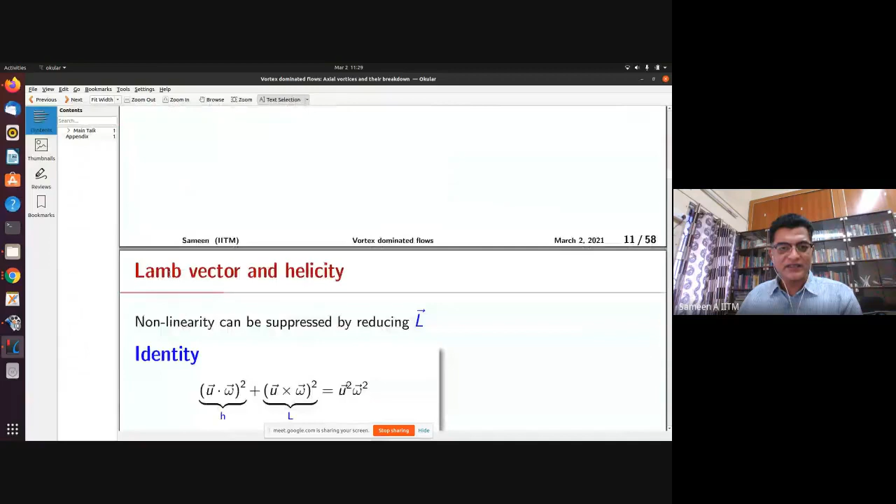I didn't follow that. Is this something I have shown in the slide? No, sir, leave it at that. No, please, we can... RNA means what? I'm not following the question. Somebody can help me here?

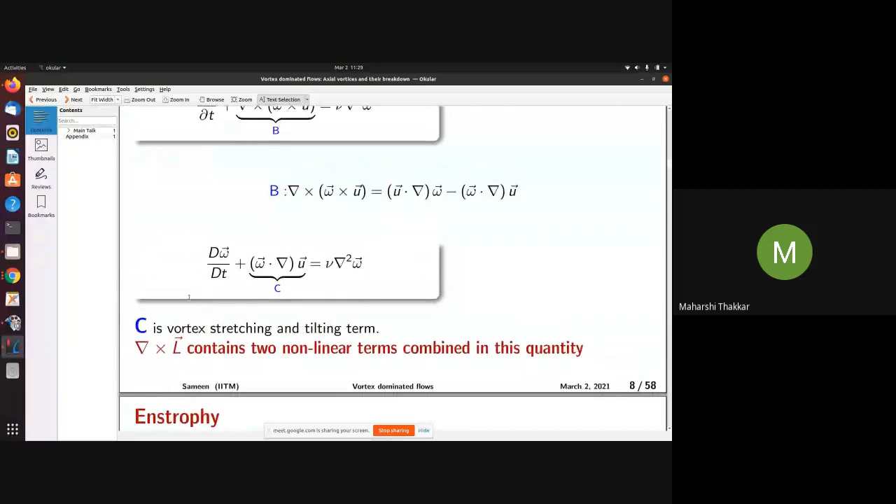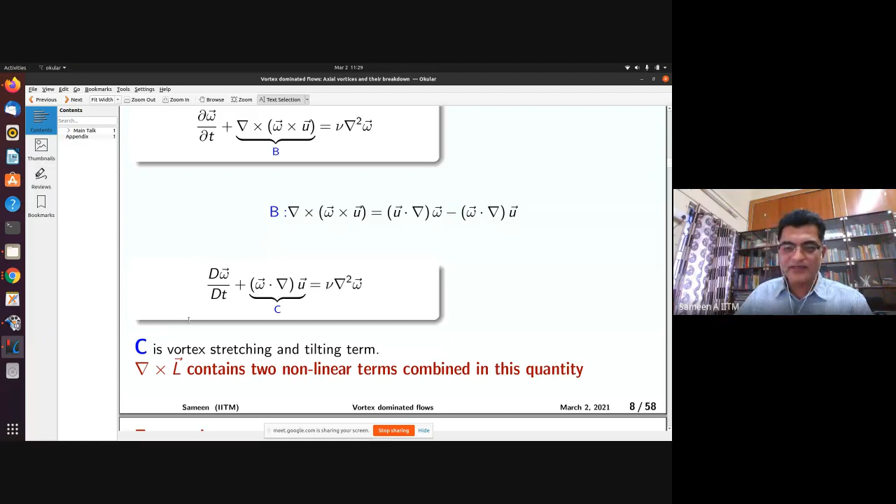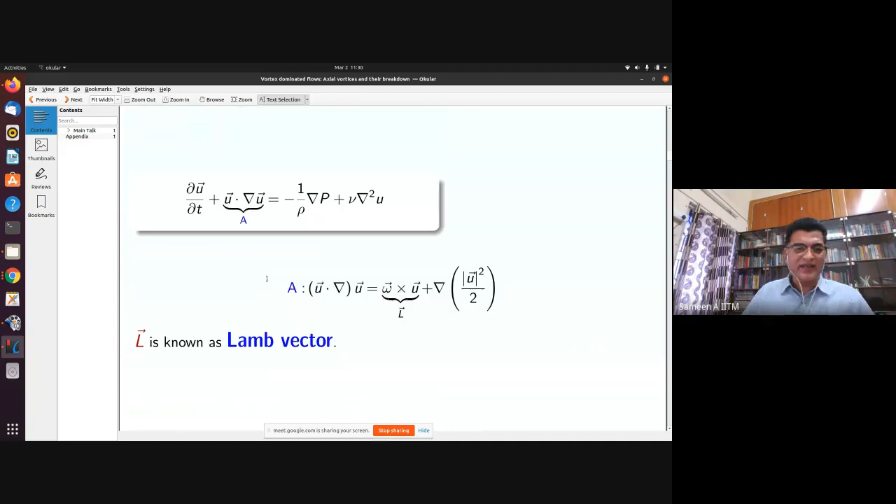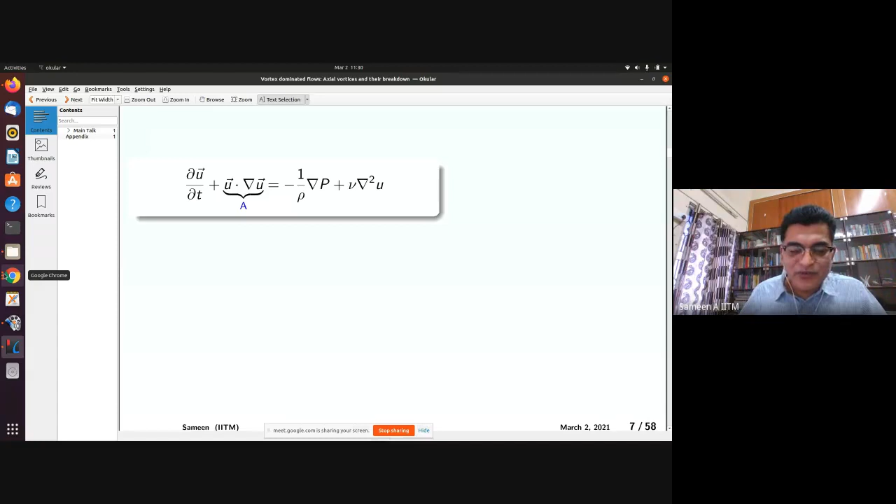Yes, Nirmal, can you specify what is RNA? Okay, it is mentioned in the chat box, sir. Okay, I can't figure out anything. Any other question? I didn't follow the question. Maybe, Nirmal, you can talk to me in private. I can try to figure out what you are trying to say. Sure, sir, sure.